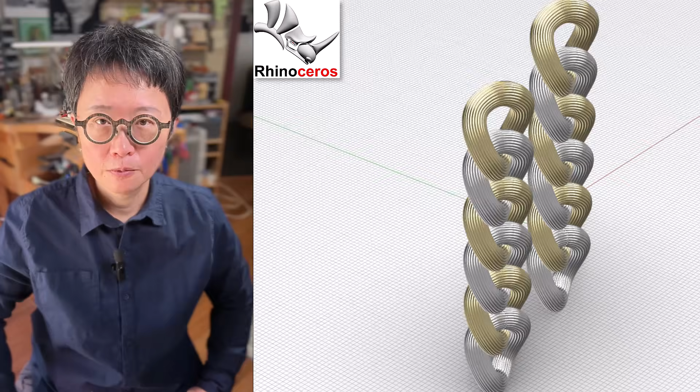This is PJ. In this video, I will show you how to model a Cuban link bracelet in the Rhino 3D software and apply linear pattern across each link. Are you ready? Let's get started.

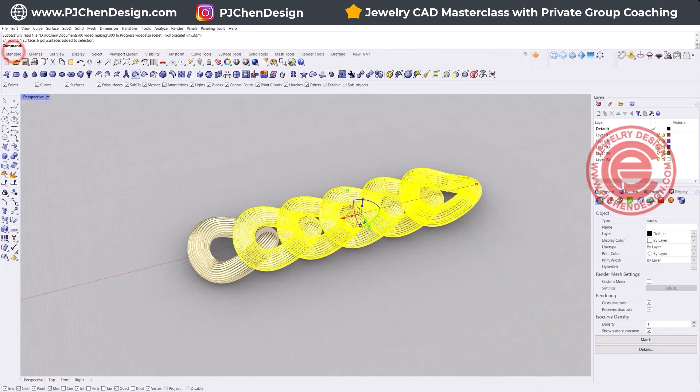If we were hiding all the chain here, using the hide command, we can try to dissect this one. You can see, as long as you have a curve, you can pipe it. So the key is how do we find the correct curve? So let's start from scratch.

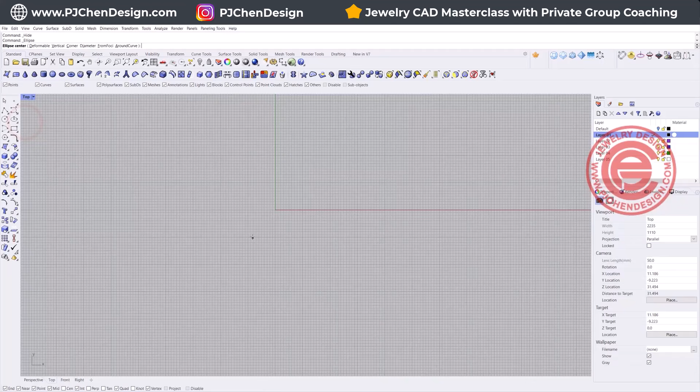We are going to come into the top view, and it depends on what size and shape you like for each link. Right here, I'm going to use the ellipse command. I'm going to snap to 0 right here and decide how big of a link I like. In this case, I have something like this. Since I'm not going to print it out, I don't really care about the size, but if you do want to print it out, you need to make sure you size accordingly.

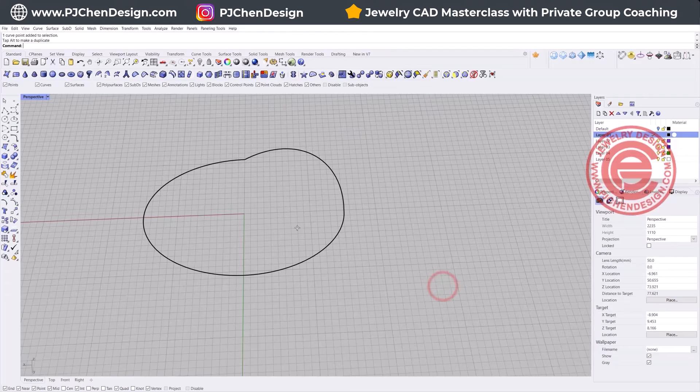Now let's take a look at this one. On this curve here, we cannot do much editing because it's a degree 2 curve. Anytime we do editing, you're going to see this kind of kink over here on the point. And that's not what we're looking for. So what we want to do first is rebuild this curve by using the rebuild command. With the rebuild, we don't need to add more points, but we do want to change to degree 3. So we'll get something like this.

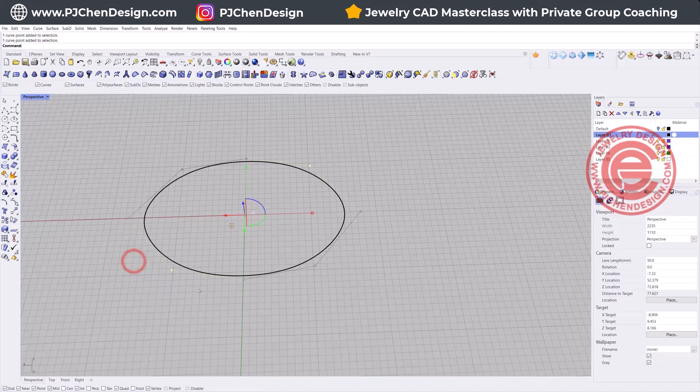Okay, so first of all, we need to adjust those points. I'm going to pick up this point, and with the gumball, I'm going to move it up 3 millimeters, for example, to see if that is the correct height. It looks all right there. And then I'm going to pick up the opposite one, and move it -3. So whatever you move to the top, you want to move to the bottom.

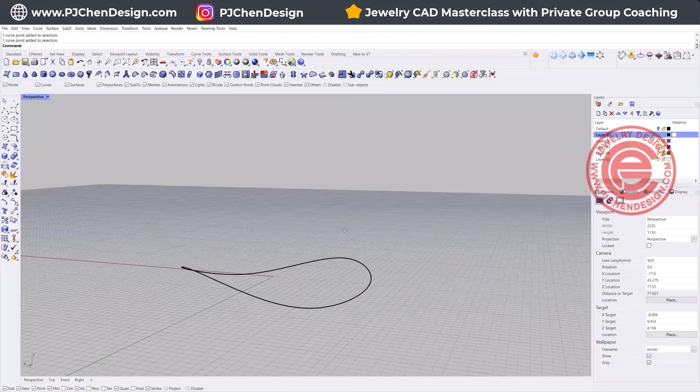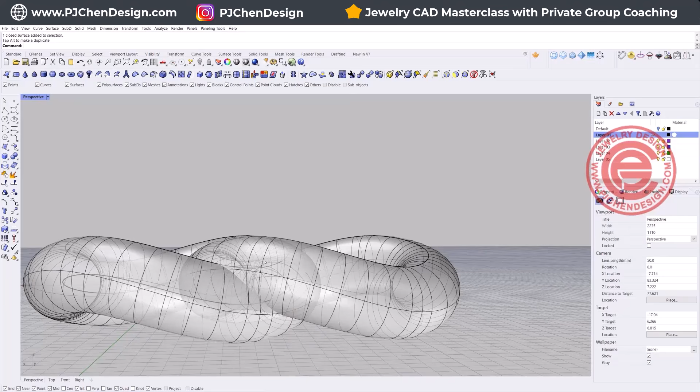Let's give it a try. Let's say I want to pipe this right here, with a size probably something like this, and we'll get this, right? And then I'm going to move one next to it to see if it is blocking. As you can see, it's blocking there. So that means I actually need the curve going up and down even more, right?

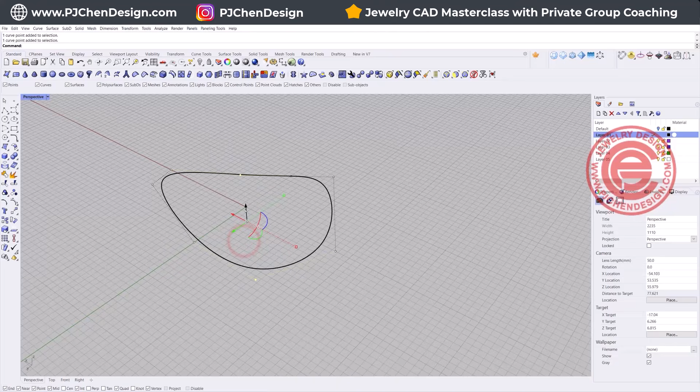So in that case, I'm going to come back here. I'm going to again pick up this point, and let's go up 2 more. So let's go 2 up. And this point and this point, let's go -2. So you kind of need to know what size you're dealing with.

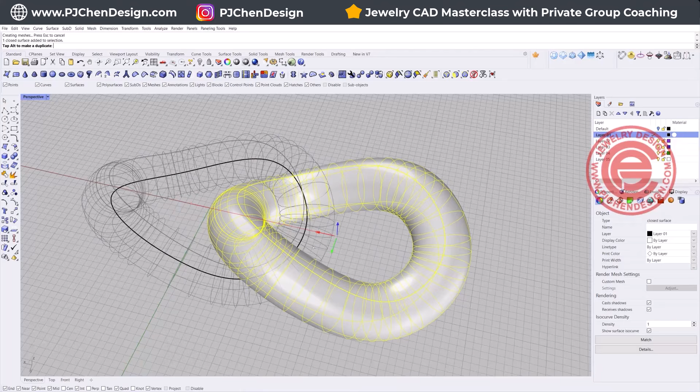Let's do it one more time. We pipe it simply at about this size, and we're again using the gumball to move it to the side, double-click, making a copy, and it gets really close. So I guess we are really close there, but we do need it a little bit bigger, with a little bit more deviation. So I'm going to pick up this one, and let's go up 2, and this one, let's go -2.

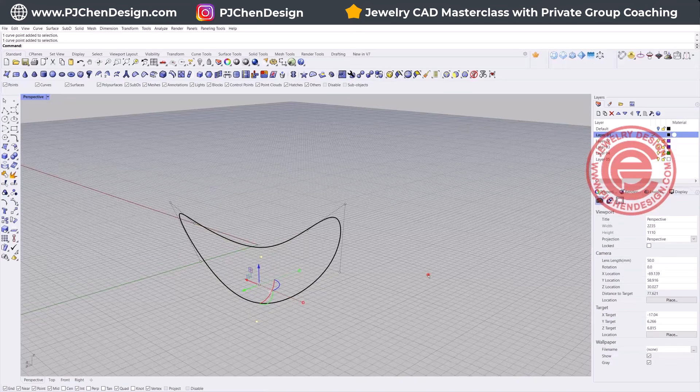So you might need to try a little bit to find the best size for you. There's no standard. You just need to try. It's because maybe the thickness is going to be different. Maybe the size of the oval is different. So that's why there's no standard size.

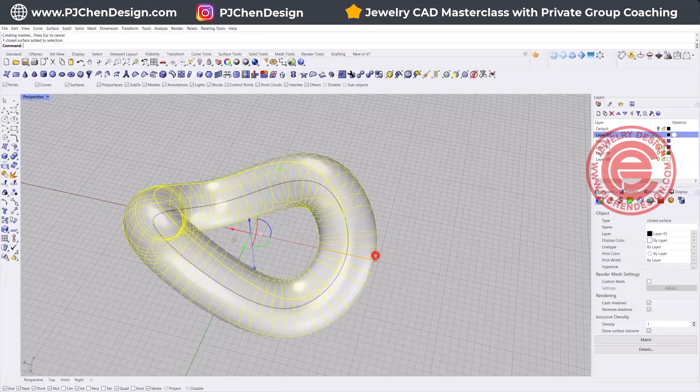All right, so I'm going to have something that looks like this, hit enter, and move it again to make sure it is not touching. All right, so that is good there. So we have this one, it's going to fit. We're going to delete everything.

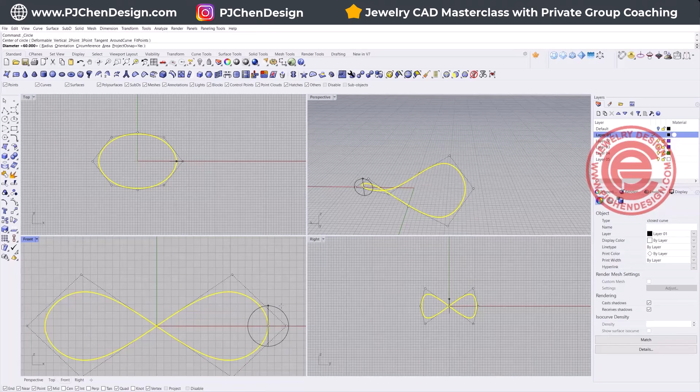Now let's keep this curve right here, and then we actually need to design the pattern. So the pattern is going to go something like this. I do not want it to be way too big, because the pattern we are going to create is going to create a thickness right there. Sweep one rail, you've got a cross section right there.

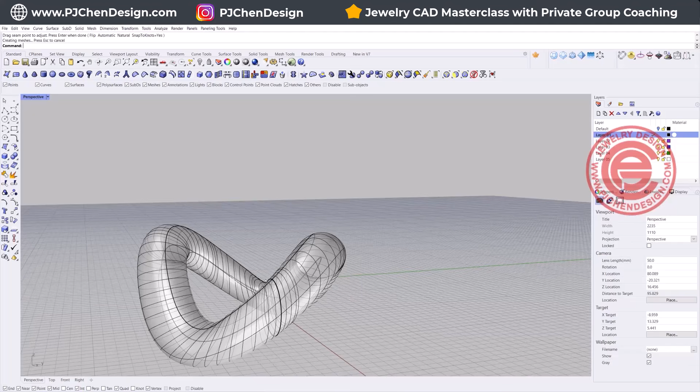You notice that the surfaces no longer keep exactly the same diameter. That's because our cross section doesn't follow our rail at 90 degrees. What I mean is, I'm going to make a copy, Control C and Control V, and tilt one of them to be something like this.

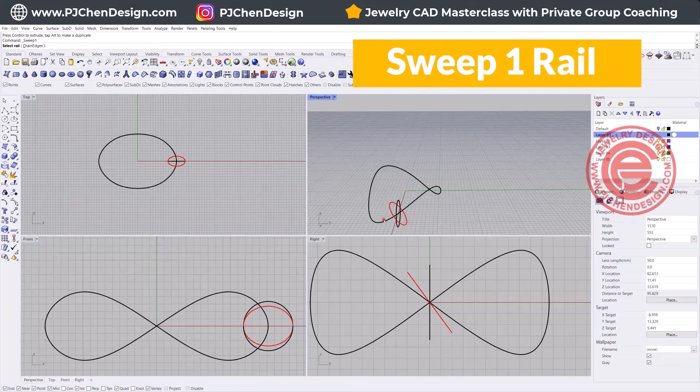Let me put it on the side view so you know what I am doing here. I'm going to use this new one and turn it red. For comparison, if I use the sweep one rail command and pick up this rail and this cross section, we get something like this. See, the form is more uniform and more like a pipe. So we're going to use this red one instead of the other one.

Let's go ahead and delete this black one. So to create the pattern, we need to divide this one, using the divide command. With the divide command, it's going to ask you where the seam is. Since it's a circle, it doesn't really matter. And it depends on how many sections you want. Let's say I want to have 20 sections.

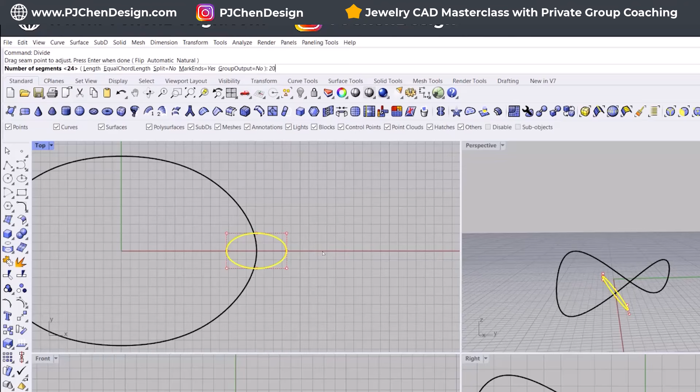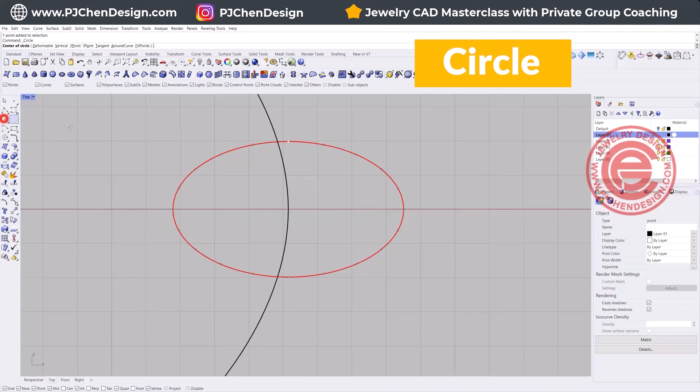Let's take a look at the pattern we have and see if this is the distance you like. Let's hit enter right there. So now we have these dots, and each point is dividing the distance in between. So if I'm going to pipe somewhere from there with about 0.8 millimeter, I should be able to get a decent size, and they are going to overlap.

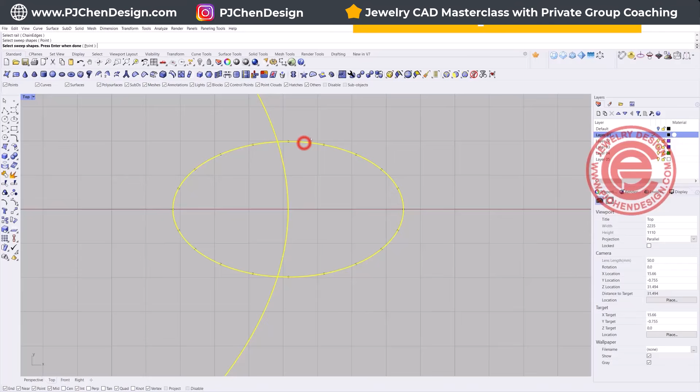Let me show you what I mean here. The way to create the pattern, we need to create the surface first, using a sweep one rail. This is the rail, this is the cross section right there. Once you're done, we have this surface right there.

So we need to create the ISO curve following those points. Let me go ahead on the bottom. We have Osnap - just check on the point and uncheck everything else. Then use the command extract ISO curve and hit enter.

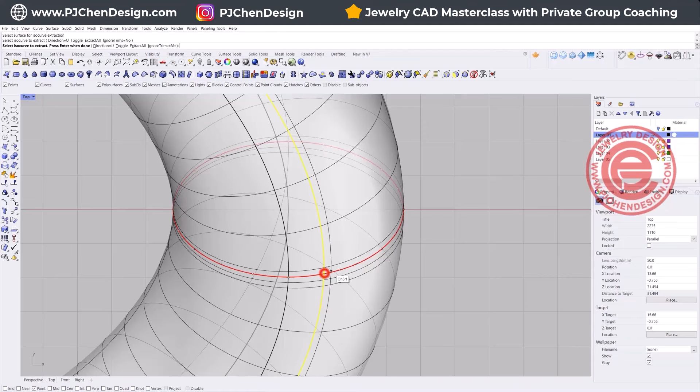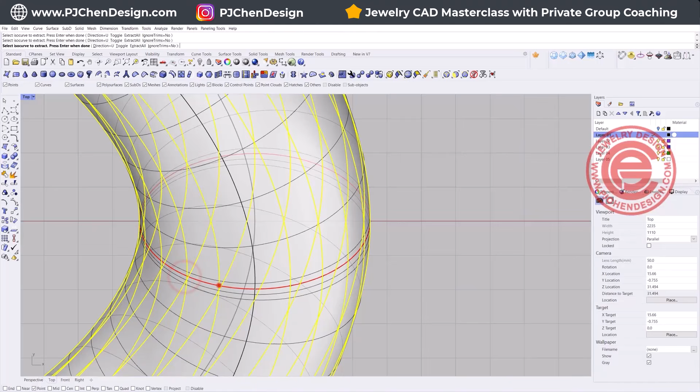We're going to pick up this surface, and I'm going to snap on every point, starting here, 1, 2, 3. You're going to extract 20 lines right there, so we want to snap everything on the point only. That's why in Osnap we don't want to select anything but just the point. Make sure you clicked all 20 of them right there and hit enter.

Now if I hide the surface, you're going to see what I have in my perspective - it's a bunch of lines there. I'm also going to hide all of this and just keep the lines that we have. Now we have the lines. Let's go ahead and pipe it.

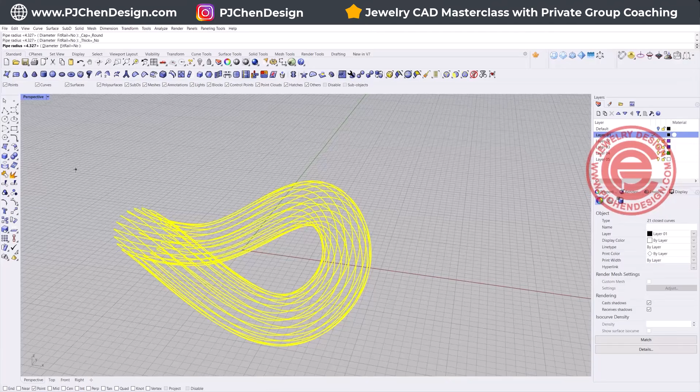I'm going to pipe it for something about radius 0.4, and let's take a look at it. One thing you need to keep in mind is that they need to be touching. If they are not touching, there's no way that you are going to cast this, right?

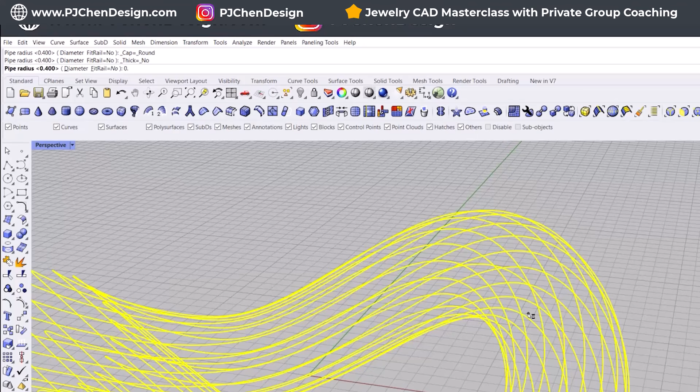So I guess my gap is a little bit too big, so I'm going to change it to 0.6, to make it 1.2 for the diameter, and see if they are touching. Now they are touching. Let's take a look at the render view and see if this is the pattern you like. If you do like it, I'll simply group them first.

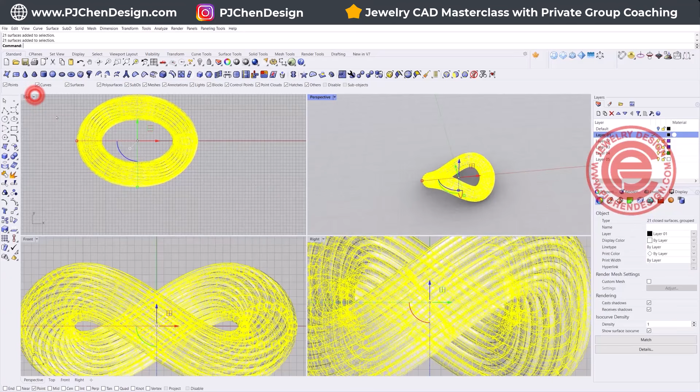Let's give it a try to see how it links together. We're going to use the linear array command, and I'm going to do 5 of them, then hold shift to make sure it is aligned, and click on it. This is how you get this type of link.

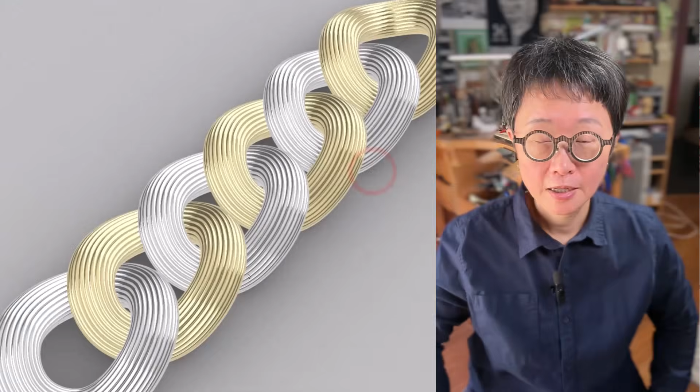That's the full process for building this Cuban link design.